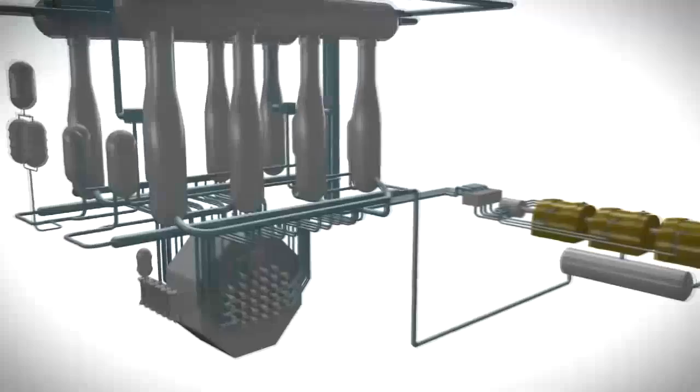We use a defense in depth approach to make sure we have adequate safety to the environment and to the public. Defense in depth means having highly reliable redundant equipment, highly trained operators, and layers of safety systems to ensure the safety of the public and the workforce here at Bruce Power. Two independent shutdown systems are poised whenever a reactor is operating. Either of them can shut the reactor down in just seconds if operating parameters are exceeded.

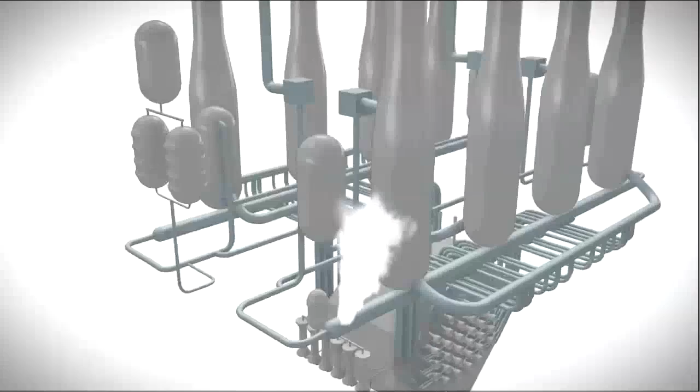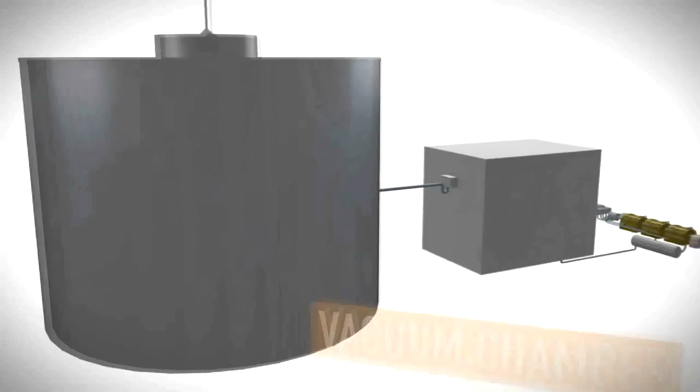In the unlikely event of a coolant leak, an emergency cooling injection system is poised to supply water to the reactor to keep the fuel from overheating. Pumps would circulate this water as long as necessary, with standby emergency generators providing power if needed. The reactors themselves are enclosed by large concrete vaults that contain heat and radiation. The vaults are connected to a large vacuum building designed to relieve pressure and provide additional containment and cooling.

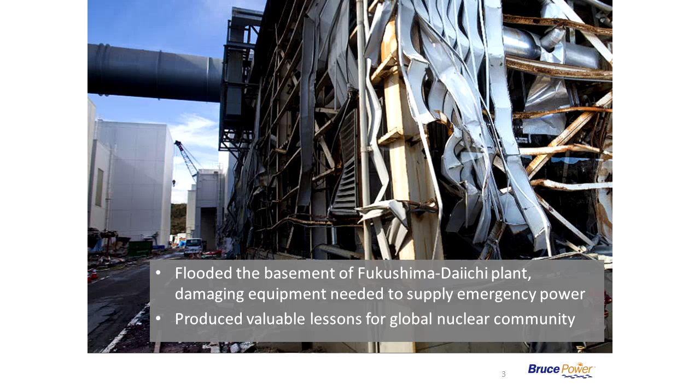This is the way plants have been designed traditionally, and they've been very safe over the years. But Fukushima brought upon a new concept, in that the plants were self-contained. They had many levels of redundancy and backup power and so forth. Fukushima demonstrated that perhaps in some circumstances a situation could arise which would actually disable all of that, because it's all in one place.

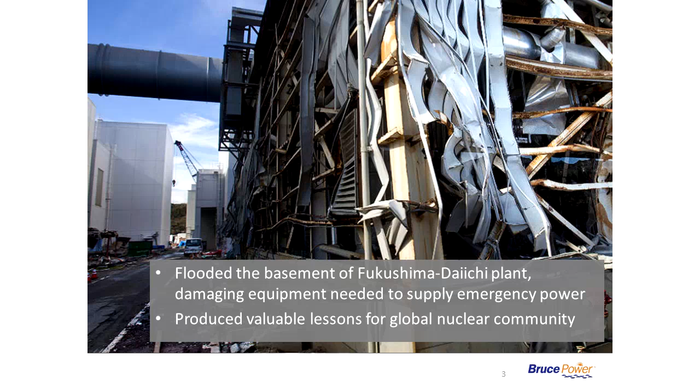The event at Fukushima was a very significant event, not likely to happen with high frequency, but still with some level of plausibility. So the challenge became how to prepare for this type of event, which is of high consequence but very low probability.

So we looked at an enhanced emergency response approach that would allow us to provide an even broader level of diversity into our protective systems. And we wanted to add some additional layers to defense, primarily aiming at the two things that a nuclear facility needs most of all, which is backup power and cooling water.

So emergency makeup water, we looked at in a number of different places. This just illustrates the changes we've been making and what they look like.

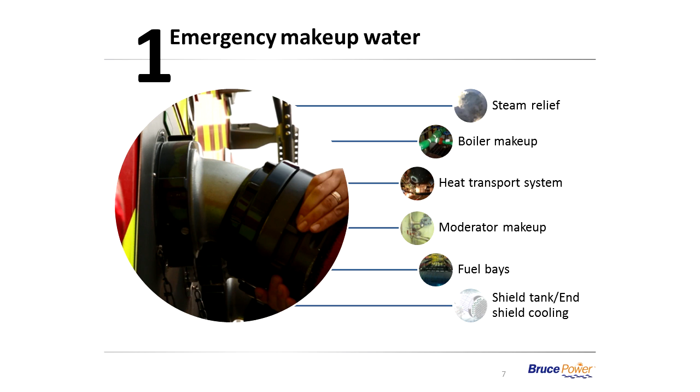If you should lose a heat sink through the turbine, then the large relief valves on top will lift in order to relieve the steam to atmosphere and cool and depressurize the heat transport system. In an emergency situation, this is exactly what you want to happen. You don't require any pumps—the heat transport system will circulate naturally, with cool water up at the top and the reactor at the bottom, and it'll cool, and the fluid will circulate with no pumps and no power.

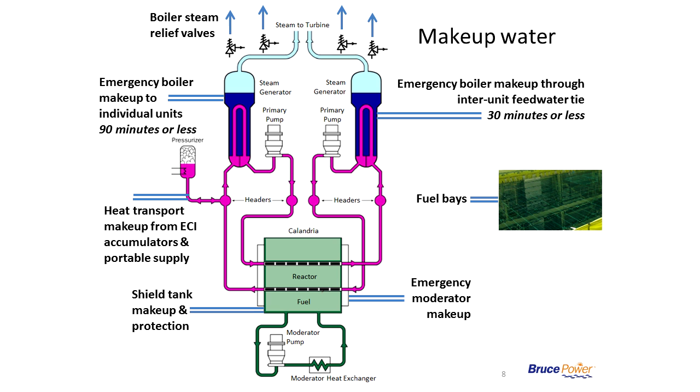To make this happen, you need a few things to be done though. Number one, you need the boiler steam valves to be open so that there's somewhere for the water to go, so it steams off as steam. Now there are different ways you can do this in the plant already. What we did was add another manual way of doing this through independent air tanks, so that we're sure we can open these valves and lock them open.

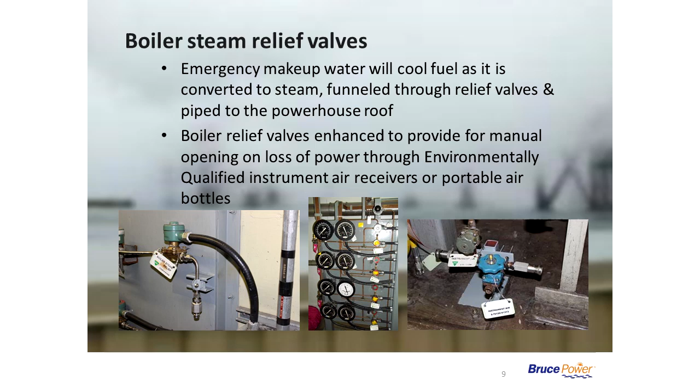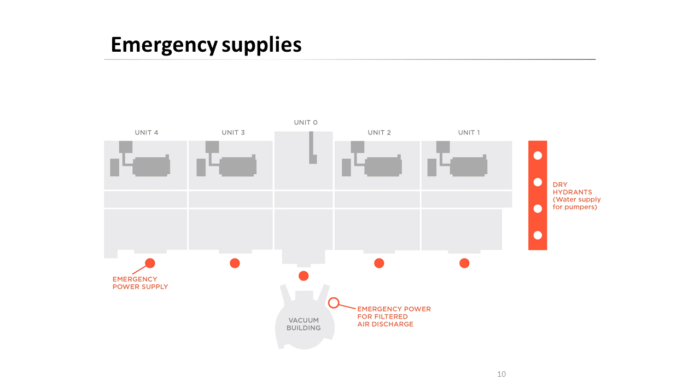Second thing you need is water in the steam generator. So the first path to water in the steam generators is through the inter-unit feed water tie, which is in place. It takes 30 minutes or less to hook this up for all 8 units, and that provides makeup water to the steam generators. Not being satisfied with one, we have a second way of making up water to the steam generators, which can be done through each individual unit. That takes about 90 minutes to hook up to all 8 units, and the time frame we have here is about 6 hours or so to do this properly.

Next thing we need to do is make sure that the heat transport stays full of water. Obviously, in order for it to circulate and cool, it needs to be full. When you bring a reactor down from power and the heat transport fluid cools, it shrinks, and you have to add makeup water to keep it full.

The 2 Bruce reactor designs have a very unique feature not seen on many reactors: what we call heat transport accumulators. They're large tanks with a large amount of water stored in them, about 625,000 liters or so, pressurized by nitrogen, requiring no pumps. They sit on the system and will supply water to the reactor automatically when needed, and there's more than ample supply to keep the heat transport system full.

There are 2 gate valves which need to open in each unit. Those are supplied from all the emergency power sources on site, but we've also provided a hookup to the portable generators to open these valves. They can also be opened manually. So there are multiple ways that we can make sure we get the feed water in.

The next layer of defense, should all that fail and you want to keep the fuel cool, is to keep the moderator full of water. The moderator is not a pressurized system; it has very large rupture discs on it. So you add water, and we have a number of ways of adding it. The main thing we needed there was the pumpers, which we have, along with our severe accident management procedures, which allow us to add water today.

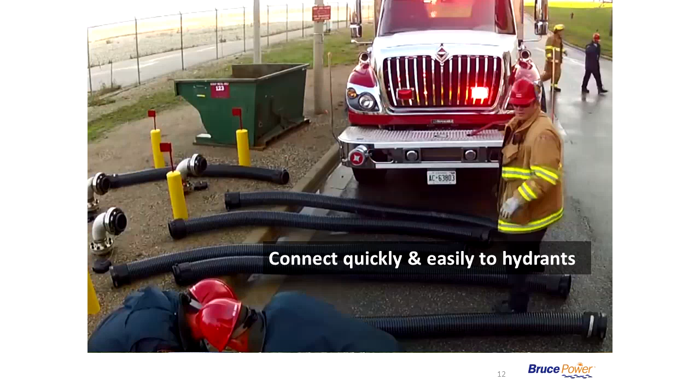These are the dry hydrants I talked about. They're actually just a pipe that drops down into the channel that flows out into the lake. This operates at lake level, so you're essentially drawing on the lake here.

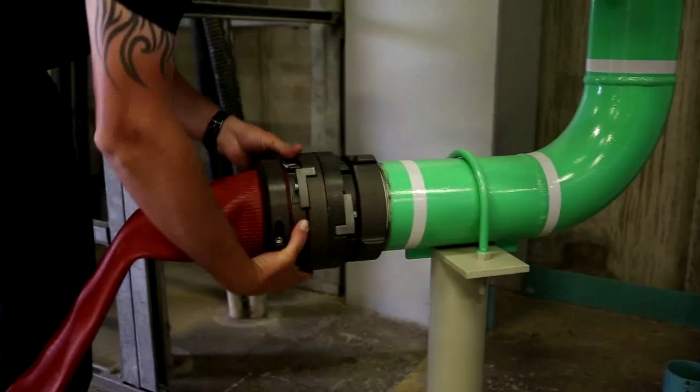You hook them up to the suction side of the truck, quick and easy, and now you're ready to pump water out the other end. This shows how the connection point works from the truck: connect there, another quick connect in the station to the inter-unit feed water tie, and you're now ready to supply water to all the boilers in either station. So that's the 30-minute hookup, that particular version.

Here are a few pictures of the individual unit hookups. Remember, I told you there are 2 ways: one I just showed you at the inter-unit feed water tie, and this other one is in the units themselves. Again, you see the quick connects here; you just hook up to them and you can supply water.

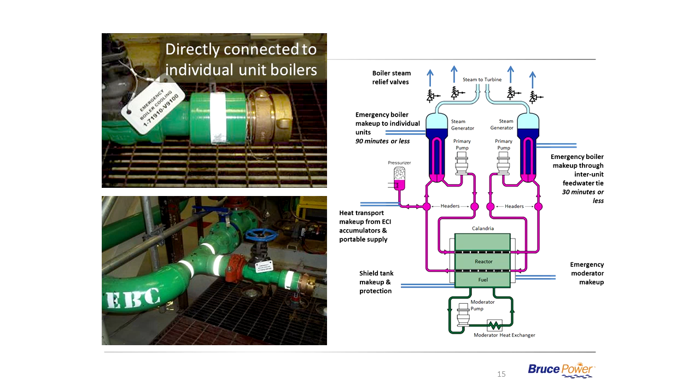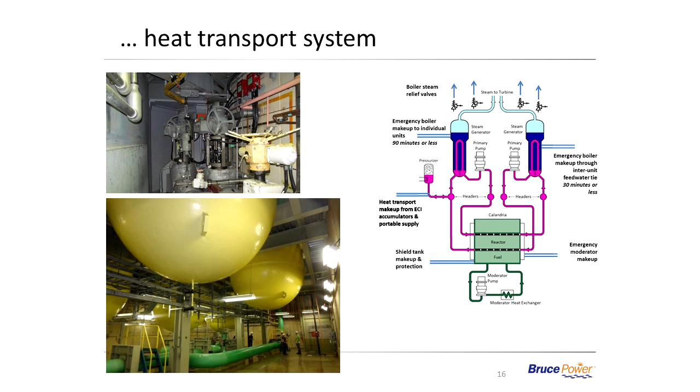The moderator makeup and the heat transport makeup to the quick disconnects - that begins happening with unit outages in 2016: 3 of them in 2016, 3 in 2017, and the last 2 in 2018. That'll be the moderator and heat transport makeup connections.

Meanwhile, we do have the SAMG process that we can use to hook up manually. The quick connects are meant to be physically diverse, providing a second way of doing it that's different from the first, and a faster way. Although in truth, in the analysis, the moderator does not need to be done in a short period of time - you have time on the moderator system.

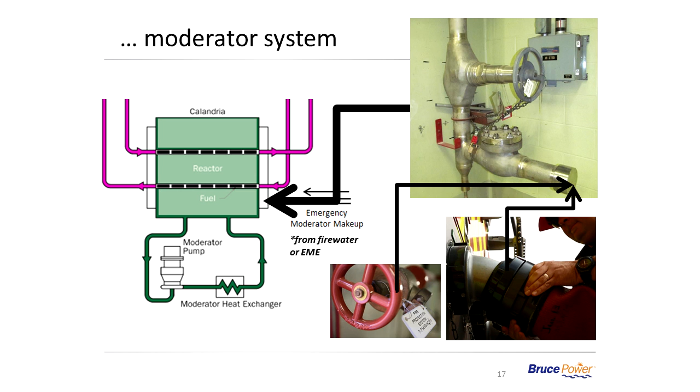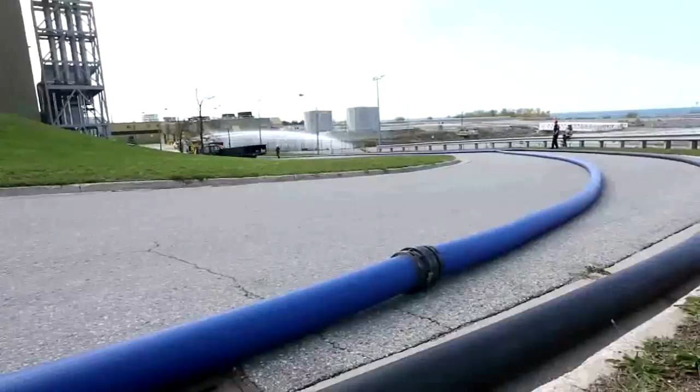Our program for the Fukushima event is really a simple concept. We're taking everyday pieces of emergency response equipment, such as fire trucks, and we've trained our staff to deploy them in an unconventional method. So instead of fighting fire, we're making connections - hard piping onto the stations themselves - to provide cooling in a timely fashion, ensuring the reactor cores remain cool and the fuel bays remain covered with water.

Now to talk a little bit about emergency power. Again, the philosophy here is quick, simple connections with material and equipment that the staff are used to using.

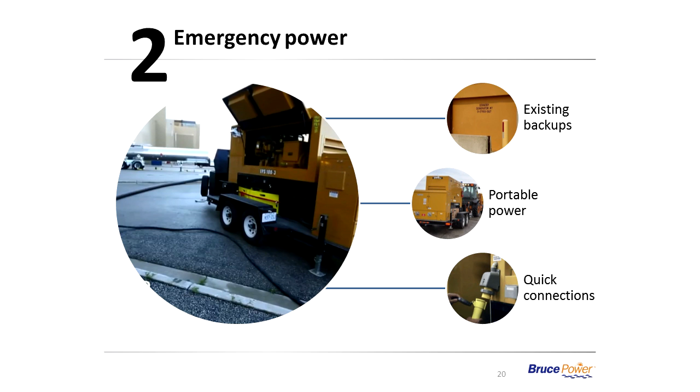So the first thing we should point out is we have a fair amount of redundancy in backup power. We have 4 standby generators and 2 emergency power generators at each station. The emergency power generators are called qualified power supply at Bruce A - a different name, but the same system. We have existing standby generators and emergency power generators that are part of the plant design.

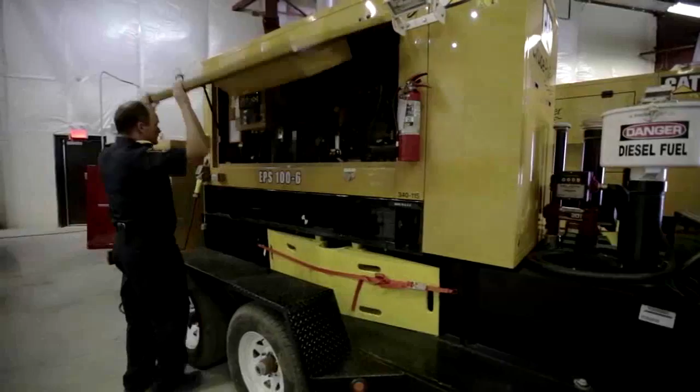There are also other backup power systems. We have diesel generators that back up our class 3, and other diesel generators that back up our qualified power supply. We realized that if we lost all of our fuel tanks, we needed another backup. They're in place to make sure that if we have a loss of class 4 power or other power losses, power still gets to the critical parts of the plant.

So you see here a few of the tractors and other things in our storage building that we use for this equipment.

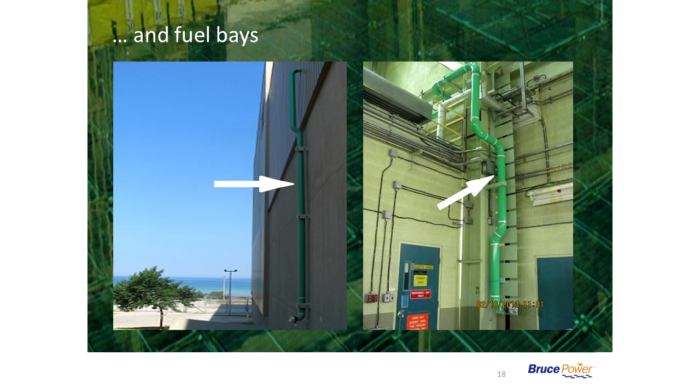A few pictures to show you - this is the Bruce B side, the 100 kilowatt generator plus the hookup; this is one of the units, I'm not sure which one, I can't quite read the sign. These are all marked inside the station so you can't misread them, and the doors leading in from the outside are marked to lead the teams to the right door so they don't have to fumble around in an emergency doing it.

Again, these are the 100 kilowatt generators. There's a redundant generator there - only 6 are required, and we have an extra.

This is at Bruce A side. The electrical system at Bruce A is a little different design, so we have a 400 kilowatt generator there, and this is it hooked up over at Bruce A.

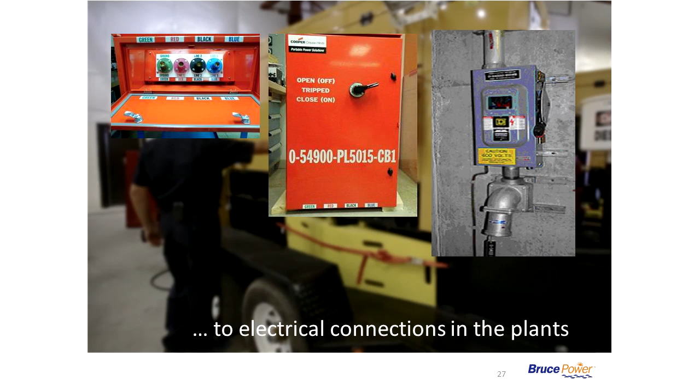The other thing, of course, is this was a lot of new equipment and new operating skills that hadn't existed before. So we needed to do the task analysis and develop the training, take people through the qualifications, and invent some new qualifications to do that, and that's been done. We're still looking at the systematic approach to training on the broader ERO skills, the guys in the emergency management centers and the like, and there's still some work ongoing. But all the emergency response personnel have been through this training and have done it many times now.

And we haven't forgotten about one of the key risks. There's some danger sometimes when you get looking at the exotic risks, the tornadoes and the big ones, that you forget about the day-to-day things that are problematic. The one that's probably the biggest risk for us, and probably the biggest risk for any building or house, is actually fire. So we haven't forgotten about that. We've been doing a lot of work on this as well, both because it's a risk day to day, and of course in a catastrophe when things go wrong and tornadoes go through, sometimes things catch fire.

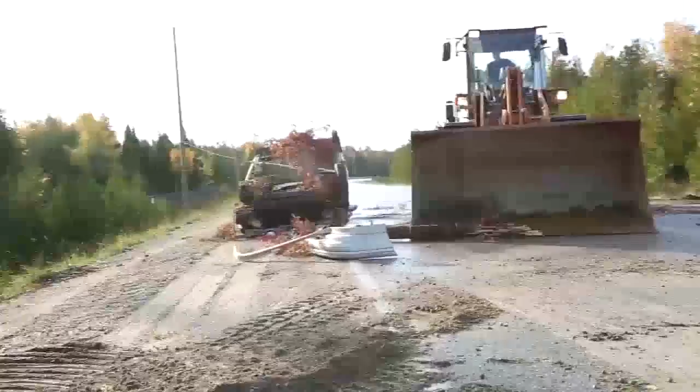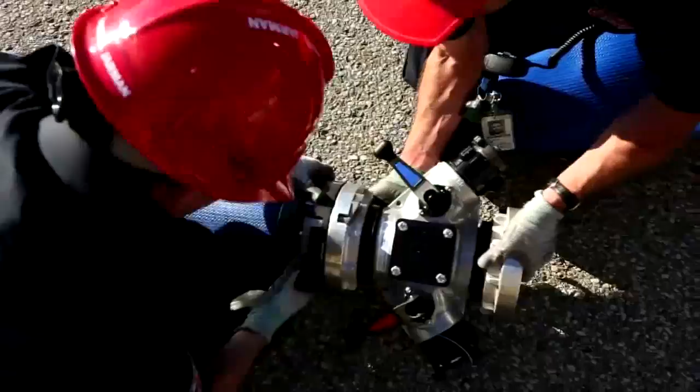Bruce Power first responders are being trained on payloaders and know how to remove debris. The payloader makes room for the fire trucks to get to the stations. The fire trucks can now pass through and get to the station to cool the fuel. Arriving at Bruce A, the team must attach hose from the dry hydrants to the trucks to pull water from the lake and pump it onto the fuel. These trucks can pull up to 3,000 gallons of water per minute, more than double the ability of standard fire trucks. They must then attach hoses to the fire trucks to deliver water to the stations. A tractor and hose trailer are used to lay hundreds of feet of hose to supply each station's 4 reactors with cool water. The water provided to each reactor keeps the fuel cool, and the risk for overheating is eliminated.

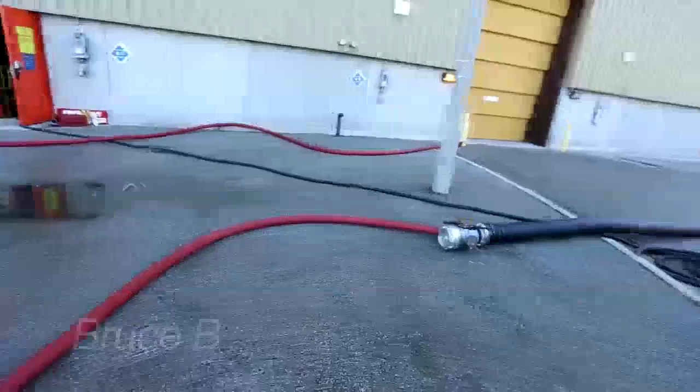Simultaneously, they must carry emergency backup generators by tractor. Bruce A has one 400 kilowatt generator, and 6 100 kilowatt generators go to Bruce B. These generators run for 36 to 48 hours without having to refuel. While the team sets up the fire trucks and generators, those working inside the plant prepare to receive the cool water and power.

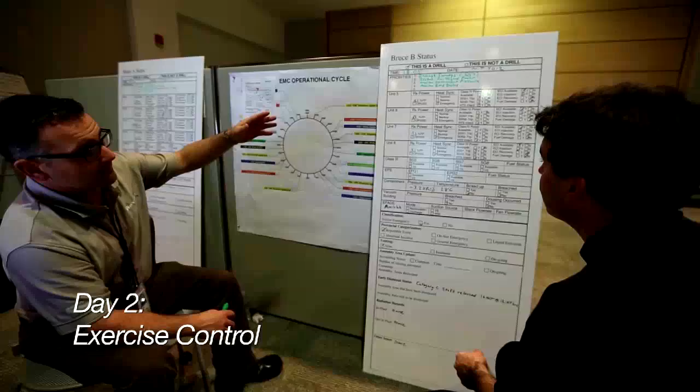Also at the Bruce Power site, Exercise Control, or XCON, continued to set up challenges for the 71 participating organizations in the 4 counties of Grey, Bruce, Huron, and Wellington. XCON is made up of staff from each participating organization and Emergency Management Ontario. These small teams of people exemplify months of planning for each exercise theme. The teams at the various emergency operations centers react to situations called injects, provided to them by the XCON team.

Huron Challenge was one of the largest emergency drills carried out in Ontario. And of course, the last thing we needed to test was the durability of the trucks and the pumpers themselves, so we put them through a 24-hour run. Back at Bruce B, the fire trucks continue to pump water well into the night. The trucks have refueled and must continue to pump water for 24 hours to prove they are self-sufficient.

Having proven self-sufficiency for over 24 hours, the following morning, the fire trucks are allowed to be shut off. Site 1, this is Bruce B. Pumpers, confirmed successful refueling through the night. Trucks have run successfully for 24 hours. Request we shut down, over.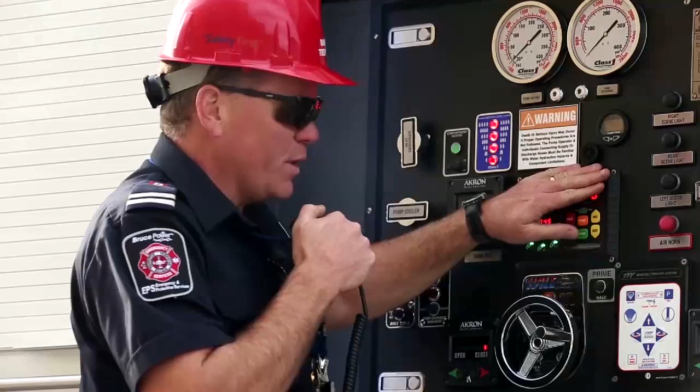In fact, we used our portable pumper to fuel those trucks while they're operating. You have to fuel them about every 5 hours when they're running full tilt like that. So the portable truck comes around and fills them up while they're running, without interruption.

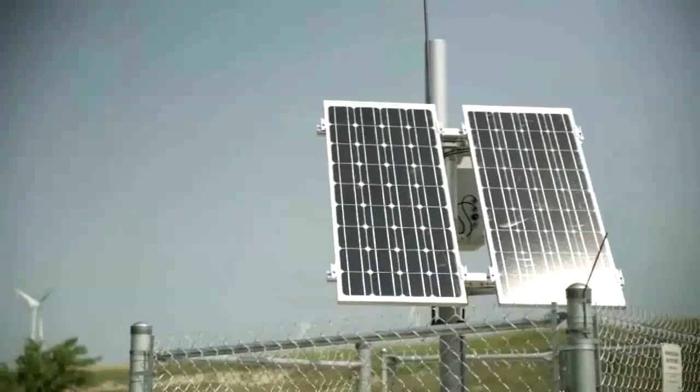And of course, the next step is, what about off-site? Should the emergency get to the point where there's an off-site release, how do you deal with that? We've developed a new off-site monitoring system out to 10 kilometers, which will automatically detect any radiation released. In fact, it'll operate 24/7 whether there's an event on or not. This will provide very accurate and detailed tracking of any radiation that might be released in an emergency, thereby allowing the government to easily move people out of the way.

The remote monitoring system at Bruce Power consists of 44 spectrometers, or radiation detectors. The system itself is fully redundant in the sense that the detectors are battery operated, with trickle backup solar panel charge to sustain operation. The data from the detectors is sent through the cellular network, which provides us the capability to have near real-time remote monitoring around the Bruce Power site.

Where we retrieve the data from the detectors is within our emergency management center, and the emergency management center itself is also fully redundant in terms of backup power and backup communication systems. So as you see behind me, we have a remote monitor with very sensitive detectors. In fact, they're so sensitive they'll actually pick up on everyday common household items.

In terms of expanding our public notification system, we've looked at not only use of sirens, but also capabilities such as FM radio connection to the public alerting system within the province of Ontario. You can have different normal or high priority messages, and I'll just type in 'this is a test,' so I'll hit send now, and that is sent.

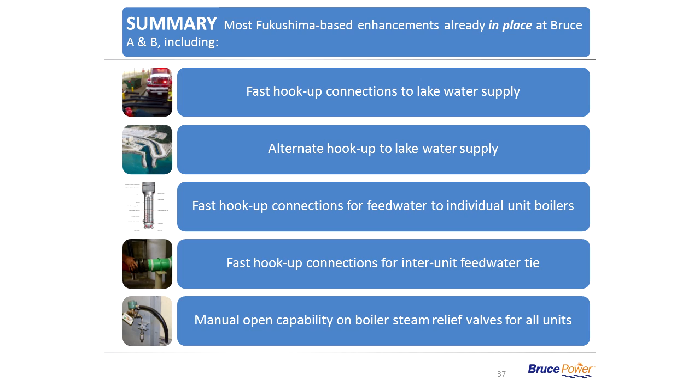Fast hook up to the lake water, alternate hook up to the lake water supply, fast hook feed water to individual and unit boilers, the inter-unit feed water tie, and manual opening on the boiler steam and relief valves on all units.

Fast hookup water connections to the primary fuel bay and to the secondary fuel bays. Fast hookup water connections to the moderator on Unit 1-2.

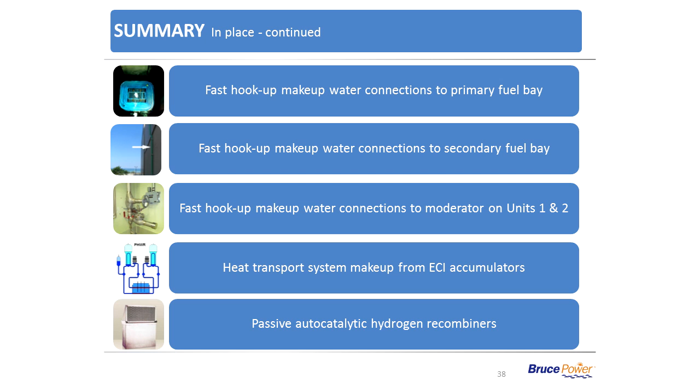Heat transport makeup from ECI accumulators and passive autocatalytic hydrogen recombiners, all done and in place. Severe accident management method to make up water to the heat transport system, and the severe accident management method to make up water to the moderator.

This basically means that we manually hook it up rather than using a quick disconnect to do it.

Fast hook up electrical connections for each unit and the common systems, as well as the EFADS. Fast hook up electrical connections for the containment emergency filtered air discharge system.

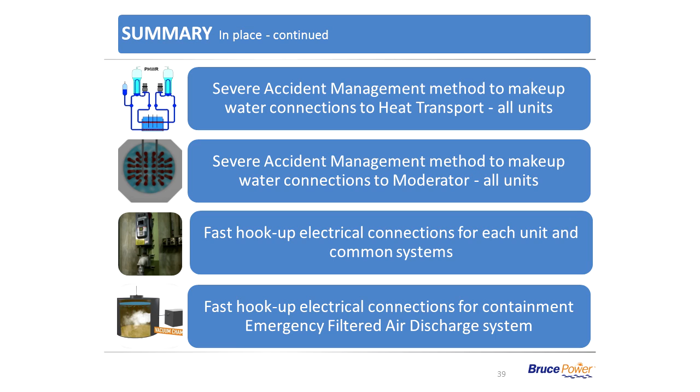Again, all in place. Support facilities: a new emergency management center in place, portable command post in place, communications capability independent of local infrastructure, so we don't require wires or even cell towers to work.

New fire training facility, as you have just seen. Portable high capacity water pumpers, 5 of those. 12 portable power generators, portable fuel retrieval and delivery truck, portable equipment transportation capability, again, all in place.

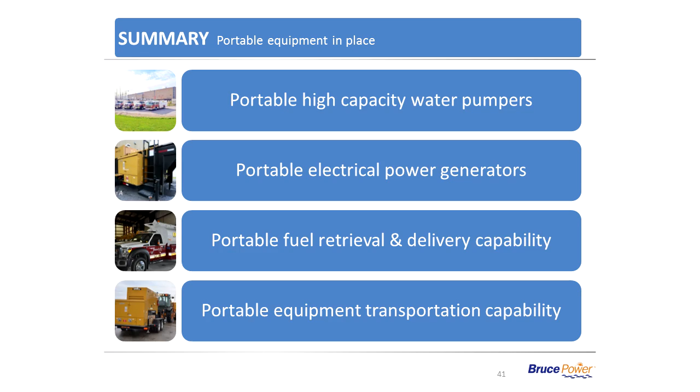Heavy-duty equipment for route clearing, portable equipment storage building, firefighting equipment, and a maintenance and testing program for all that equipment, all in place as of today.

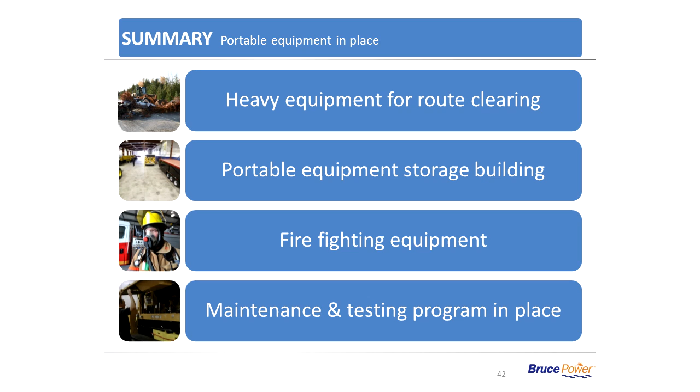Off-site support in place. We've got a communication system that works very well. We can talk to people virtually anytime.

The radiation monitors out to 10 kilometers are in place, and we have deployable radiation monitors that we can deploy beyond that should we need to.

Potassium iodide tablets, we actually just started to get the delivery today. They were a little slow, so this is them in the new package, and we can let you have a look at those after a bit if you like.

And this is a booklet. It's also on the Be Prepared page on the Bruce Grey website now, with all the different emergencies in it, including nuclear. The FM alert radios are here, the system is ready to go.

We opted to do the distribution after we do the KI pills so as not to confuse people, so we'll be doing that very shortly.

And that'll actually be a fairly broad distribution because we don't see the FM alert as particularly a nuclear capability. It's a capability that the communities can use for emergencies in general. It just includes nuclear.

Safety assessments. Our chief engineer is going to talk here in a minute about the safety assessments and where we've got to, but we've included some pretty extreme external events in here.

Despite that we broadened the events and broadened the requirements considerably, the addition of the EME, as you might expect - the emergency mitigating equipment - as a whole new layer of defense, has made a significant improvement on the overall outcome of those PSA results.

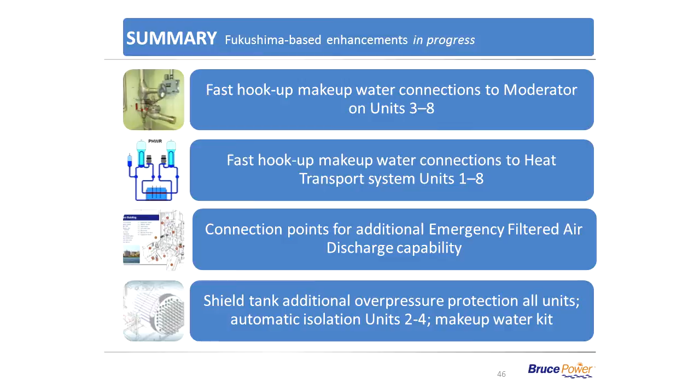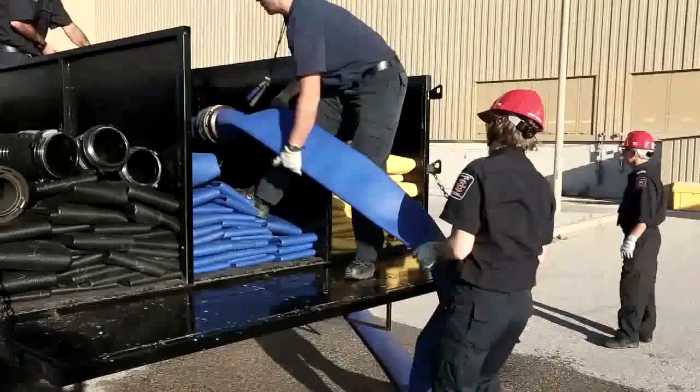We feel that we've taken the Fukushima events very seriously, applying the lessons in a much broader sense than they would have applied in Fukushima, looking at not just those kinds of events but any kind of event that might occur. We think our crews are well trained and on standby 24/7, so we feel we have the capability in place to deal with virtually any emergency. We invite you to drop by our visitor center and have a closer look at the plant and the facilities here, and I think you too will walk away with a level of confidence that the place is well looked after and we're well prepared.

That was a little long, but I thought it important given the central place that Fukushima has taken in the last few years and the amount of effort and time put into it, to really go through it in some detail and talk about what's fully in place and what's yet to be done. So that's it for that presentation. I'll now move over to Mr. Newman to talk about PSA.

Okay, excuse me. Thank you, Frank. Good evening, for the record, Gary Newman. I'm going to be speaking to you this evening about assessing and understanding risk. We'll be doing so at a fairly high level. Obviously we could spend a number of days discussing this topic if time were available.

So for the purpose of this Part 2 Commission hearing, we felt it was important to provide more detail on all the work completed to evaluate both internal and external sources of risk, which in turn demonstrates that Bruce Power is compliant with current CNSC regulations.

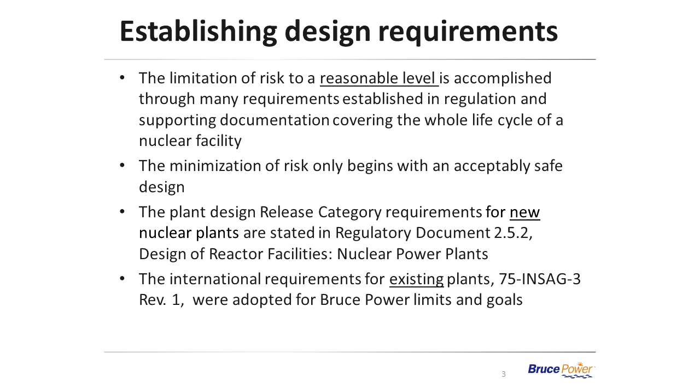The design requirements were established in the original siting guide, which identified the deterministic design and operating requirements and sets the single and dual failure dose limits.

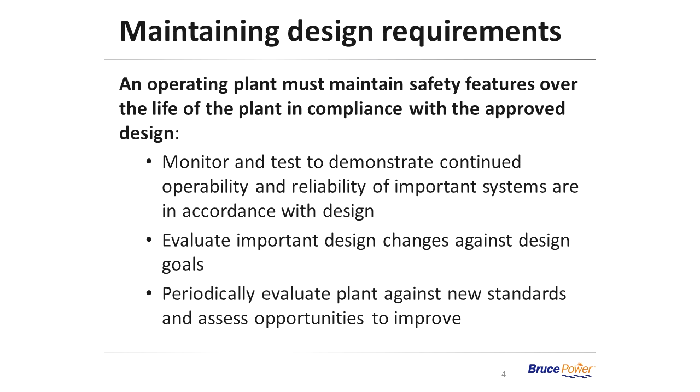From a safety report viewpoint, probabilistic assessments were added to the original deterministic tool set beginning in the 1990s. At that time, goals and limits were set for severe core damage, large and severe release, as well as public health criteria. These early PSAs embraced release thresholds that were approximately 5 times larger than the current values, which has resulted in the need to produce more accurate predictions within the current assessments.

These historic PSA assessments were completed after the plants were in operation for many years, rather than as part of the design activity. Modeling activities were focused on comparing with the new expectations, so in general only enough work was completed to confirm that the limit was achieved.

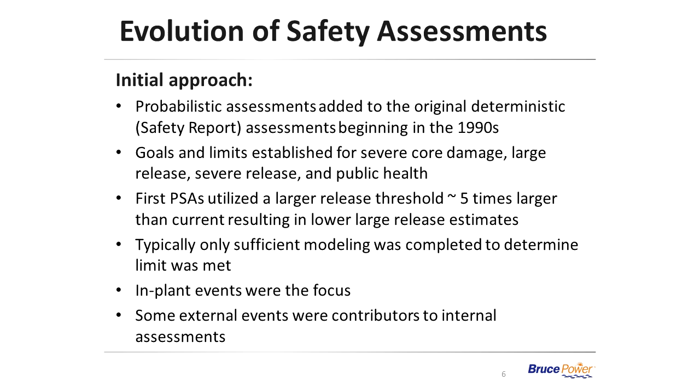This meant that many supporting systems were not modeled but simply assumed to not be available as a result of the event, which adds a considerable amount of conservatism. These assessments were focused on internal plant events, including the loss of off-site power, the latter of which was a single external event that was considered.

As part of the safety assessment evolution, a greater focus on external events was established by CNSC Standard 294 in 2005.

However, post-Fukushima, it was decided to broaden the approach to consider lower probability external events, accommodation of a larger consequence but lower likelihood event, and lastly, equipment diversity in the context of the robust nature to resist external disaster scenarios.

As per normal practice, updated regulatory documents in terms of both deterministic and probabilistic assessments were issued to guide this work by our regulator. The release categories were first updated in S294 based upon international practices and again documented in the regulatory documents when these new documents were issued.

So in the case of new reactor facilities, the sum of the frequencies are considered as follows. In the case of severe core damage frequency, the sum of the frequencies of all event sequences that can lead to significant core degradation shall be less than 10 to the minus 5 events per reactor year.

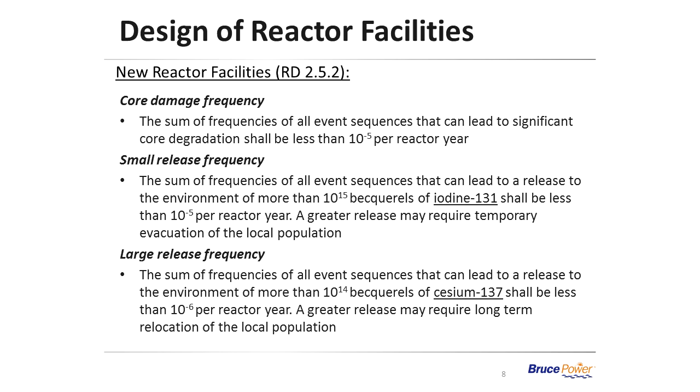These definitions were developed based on internal plant events, and there remains a discussion about how to properly integrate external and internal events and properly calculate an accurate aggregated release frequency. However, for the purposes of today's discussion, we have simply added them, although we know this is a conservative treatment.

As an example of the continuous improvement process, work has been completed to enhance the Bruce A and B safety reports through updated PSAs, which consider fire, seismic, high winds, and flooding under both operating and shutdown conditions. This was completed against the backdrop of updated PSA release categories.

The following lists the safety improvements that have been installed in the plants and were included in the internal plant event assessments. For example, the emergency makeup water from portable equipment directly into the boilers, as already described by Mr. Saunders. I do not plan to go through the list. However, most of these improvements have been fully installed and credited within the PSAs.

Fast makeup water to the heat transport system is currently ensured by additional emergency power to the emergency core injection accumulator tanks. Another committed makeup path for emergency mitigation equipment utilizes severe accident management instructions, which can also be established. Installation of a third path through quick connect fittings is in progress.

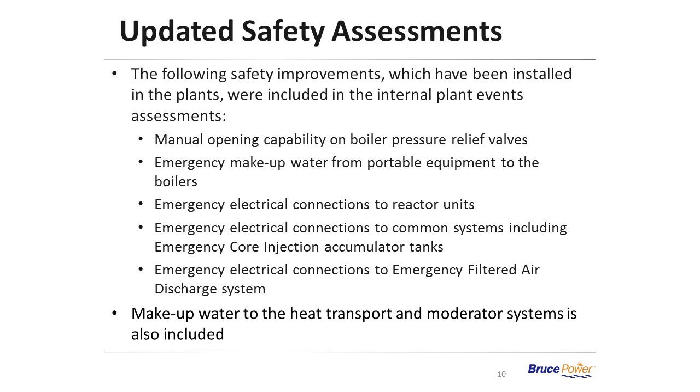Makeup water to the moderator system from emergency mitigation equipment utilizing severe accident management instructions can also be established. Installation of another path through quick connect fittings is in place for units 1 and 2 and in progress for units 3 to 8, as already described. I should note there was one additional bullet that may not be on your slide, regarding makeup water to the heat transport and moderator systems, which we added afterwards.

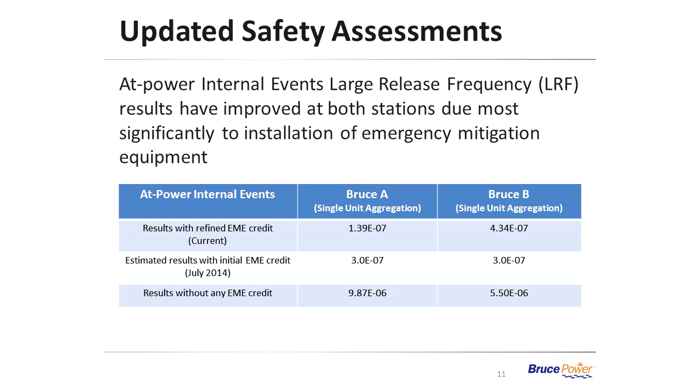Within the PSAs, also the estimated values for EME were provided in the July submission to the CNSC and more precisely calculated in the November license application update. The estimates proved to be pretty accurate.

Some safety improvements that were committed and currently in progress, as already described by Mr. Saunders, are credited in the station aggregation for large release frequencies and external events, for example, enhancements to containment robustness for multi-unit events. Although still a very conservative calculation, it demonstrates the progress made through the Fukushima enhancements and the value of the work still in progress.

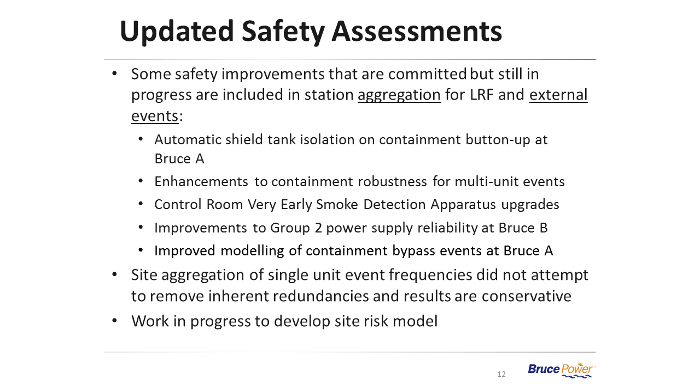It is also important to note that site aggregation of single unit event frequencies did not attempt to remove the inherent redundancies, and results are considered conservative. Lastly, industry-driven further work is underway to develop a site-based risk model, which we believe is currently leading the industry in this area of development.

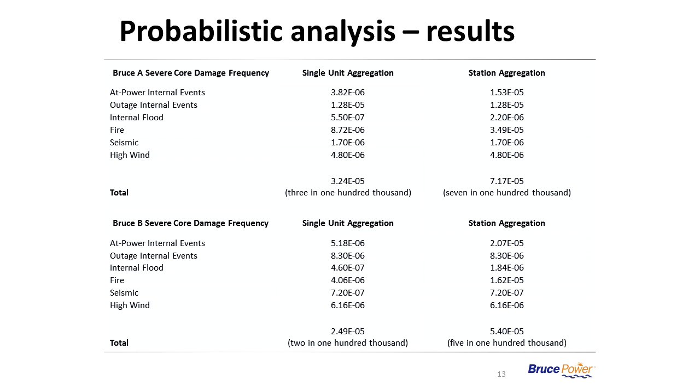On the next slide, we have results for severe core damage. This table provides results for each station, for the combination of internal and external events, for single unit aggregation results in column 2, as well as station aggregate results in column 3. All of these results meet the requirements of the current criteria.

On the next slide, we similarly summarize for large release frequency. These results demonstrate that on both a unit and station basis, we meet the current acceptance criteria.

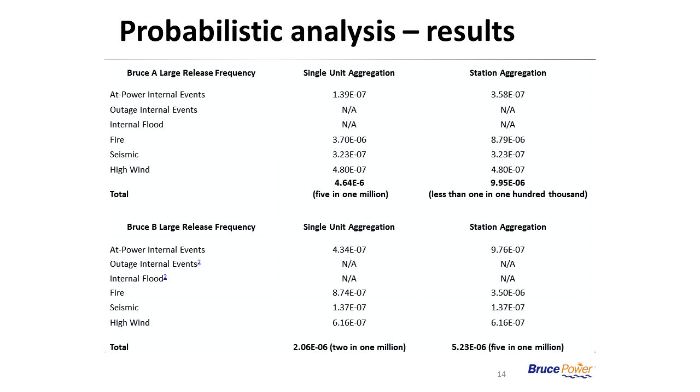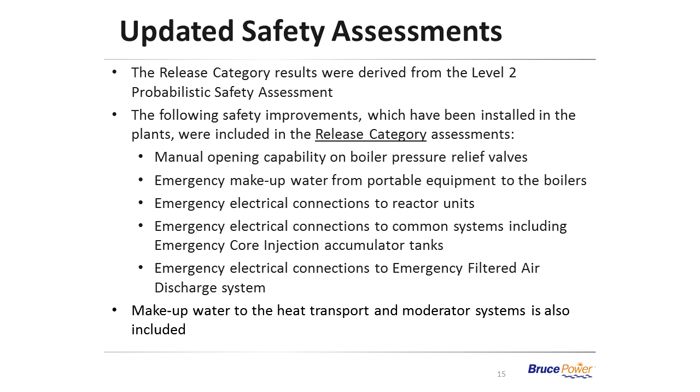Just like for the severe core damage frequency calculations, we have similarly credited installed EME for release category assessments, and you can see examples of the noted improvements in the following table. So for example, the design basis events at both stations, one can see the frequency improvement when crediting EME, comparing the third and fourth columns. These release frequencies, while still very unlikely, are the most probable.

The releases would occur as a result of venting of containment through the emergency filtered air discharge system. This type of venting maintains containment pressure low and prevents release of isotopes that can result in longer-term contamination. These are the type of events where shelter in place may be a viable option, and as Mr. Saunders has indicated, the use of potassium iodide may be directed.

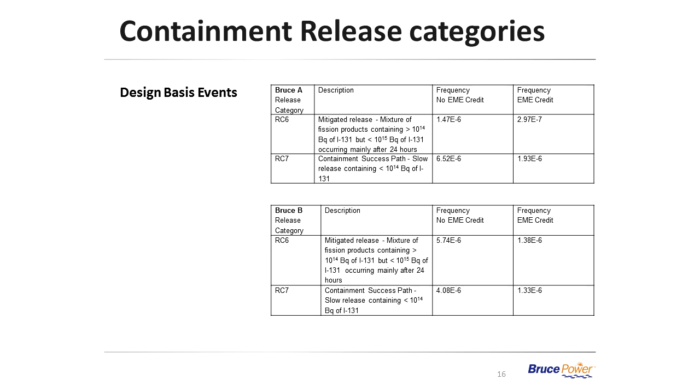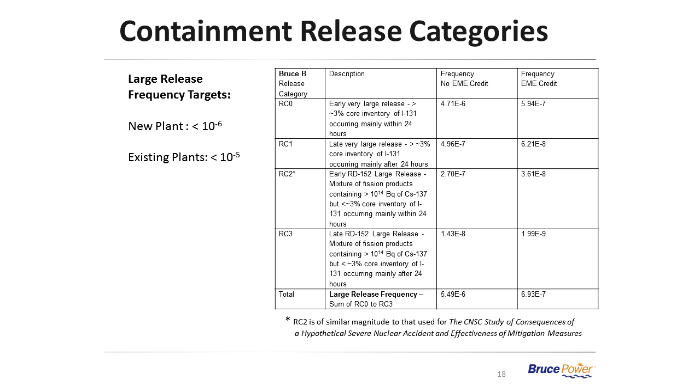And on the next slide, the same again for Bruce B. Decrease in frequency when EME is credited, well below the 10 to the minus 6 cutoff, normally associated with incredible events.

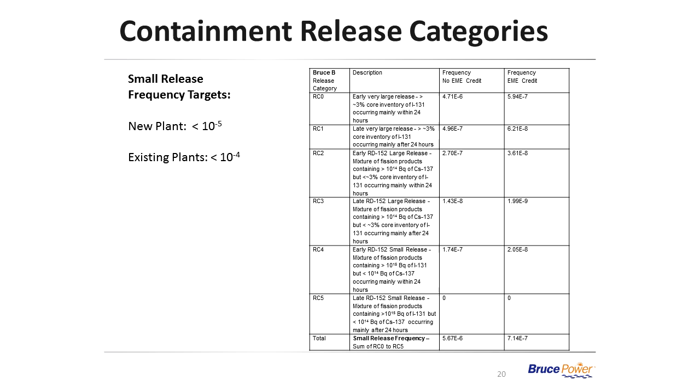And on the next slide again, the same outcome for Bruce B. And again, as already noted, the term small release by definition includes both small and large releases, and might more accurately be called all releases or total releases.

Moving on to some of the new tools that we're deploying, and again, this was touched on by Mr. Saunders, we are developing tools which enhance emergency response capability to aid in our already extensive drill requirements by simulating events to identify areas for improvement within existing practices to make them even more robust. The tool also provides, through Monte Carlo simulation, the probability of successful deployment of EME under a wide variety of circumstances and points out potential challenges which can then be adjusted to further enhance our response capability.

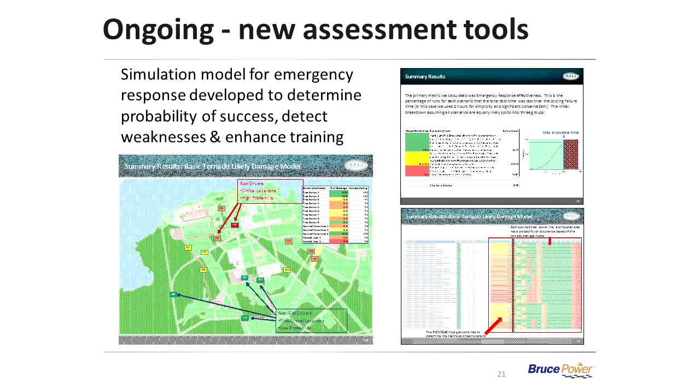As I noted earlier in the presentation, there are a number of in-flight projects that are being implemented to add further enhancements to the stations. And these are all on track, as described by Mr. Saunders, as per schedule and as communicated through formal correspondence with the CNSC.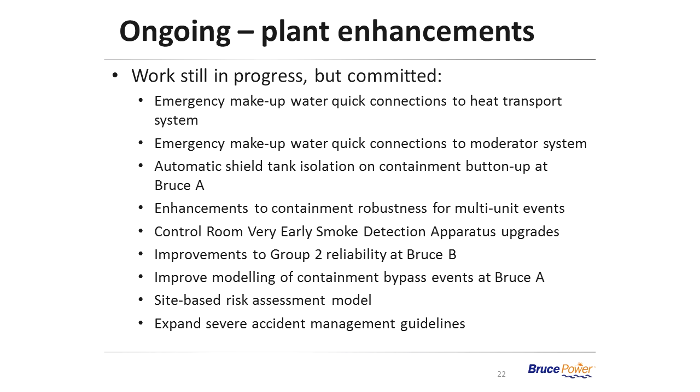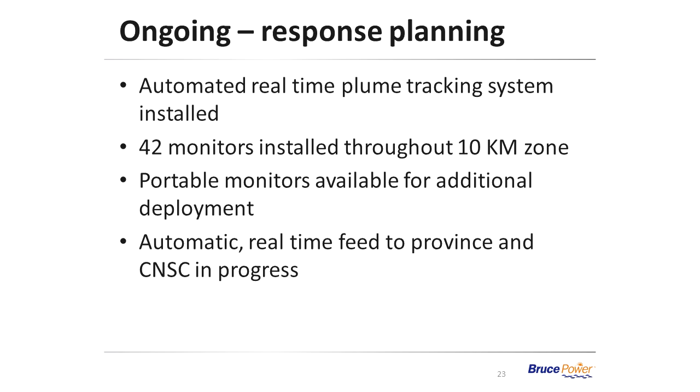Current ongoing work supporting response planning, including, as already mentioned, 42 installed monitors within a 10-kilometer zone, automated real-time plume tracking system supported by portable monitors available for additional deployment, with implementation of automatic real-time feed to both the province and the CNSC organizations. It is important to note that this is not just a paper exercise, but that the information gained from these assessments is being utilized to enhance both on and off-site emergency response capability.

In addition, work is underway to develop enhanced predictive plume modeling at the industry, provincial, and regulatory levels. And this modeling capability will support assessment of a suite of accident scenarios. This is consistent with the practice by the US NRC.

Working with the province and municipalities to improve public alerting capabilities for all emergencies through technologies such as the FM alert, which provides further defense in depth, and this is due to begin this spring. In addition, we are working with Pelmorex and communication companies to establish a cellular text alert system. Again, we are building additional barriers to ensure continuous improvements to our response capability.

An additional element of our response planning is the distribution of potassium iodide to a radius of approximately 10 kilometers. This measure is just underway with the necessary instructions along with website and public information sessions. Once complete, we will have measures in place to sustain the program through a periodic refresher program. And lastly, distribution centers will be set from 10 to 50 kilometers to allow access.

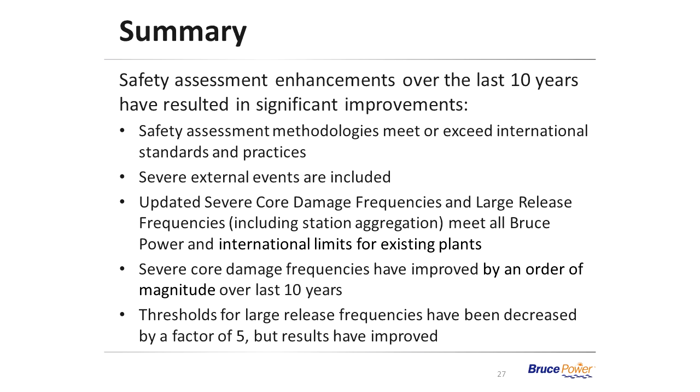In summary, Bruce Power and the industry have been diligent over the operating life of our plants to review plant design against modern standards, including safety assessment methodologies, and to apply this knowledge in real plant enhancements. We've seen some of those in the prior presentation tonight. The continuous improvement in plant performance that has resulted from this effort is a demonstration of the superior approach in the Canadian regulatory environment, which encourages ongoing improvements.

The Fukushima enhancements have been effective at reducing overall risk. Based on the current practice of analyzing large release frequency against in-plant events, including multi-unit events, Bruce Power not only meets the international standards for releases for existing plants, but for the most part would meet the requirements for new plants. The work already committed for Bruce A is expected to also bring Bruce A in line with these numbers. We do expect, as aggregation of individual results is considered both in Canada and internationally, changes will occur in some of these methodologies. Bruce Power will continue to participate and support this effort.

We have considered the release category results of the PSA work as well as the CNSC study on hypothetical severe nuclear accidents and effectiveness of mitigation measures in relation to off-site emergency planning, and find that the current planning zones are adequate, but that the reliance on local infrastructure for monitoring and communication in a regional disaster scenario needs to be reduced.

Finally, it should be noted that the calculations to complete these assessments were rigorous, with the final results encompassing nearly 40,000 pages. Large amounts of time could be spent debating all the possible perturbations, but the work was completed in accordance with approved methodology and at a high level has been summarized in the preceding series of slides. Thank you.

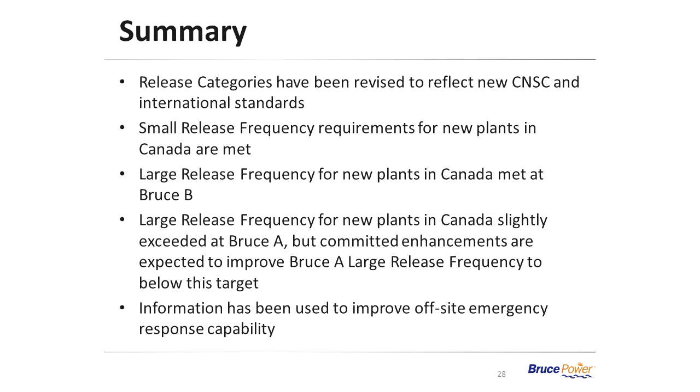Frank Saunders again for the record. One short presentation left from our side. This goes to some questions we had from the commissioners at the last part one hearing around what the monitoring points were that we used to assess public dose. So this is a short presentation to show you where those various monitoring points are and what they look like.

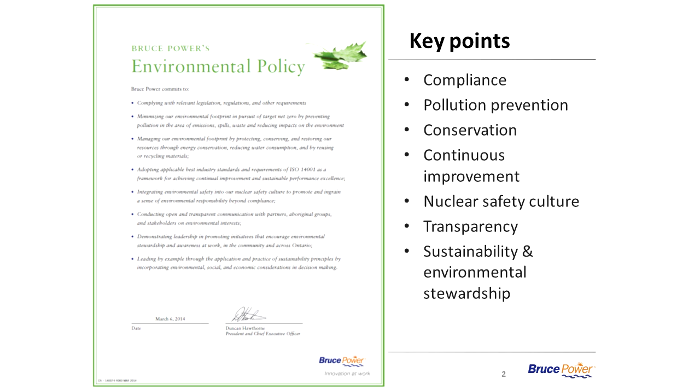This is our environmental policy and the key points that we use in our day-to-day operations. Environmental management encompasses a number of programs. There's an ISO 14001 which governs our management system, and then CSA standards govern how we actually carry out a number of these activities.

Our normal dose found in terms of members of the public has been pretty consistent ever since we became Bruce Power, in the order of 0.1% of the safe allowable limit.

So this is where we sit in the province of Ontario. The two sources here, of course, the Bruce B on the bottom and Bruce A on the right, with a blue and a red figure indicating air and water emissions.

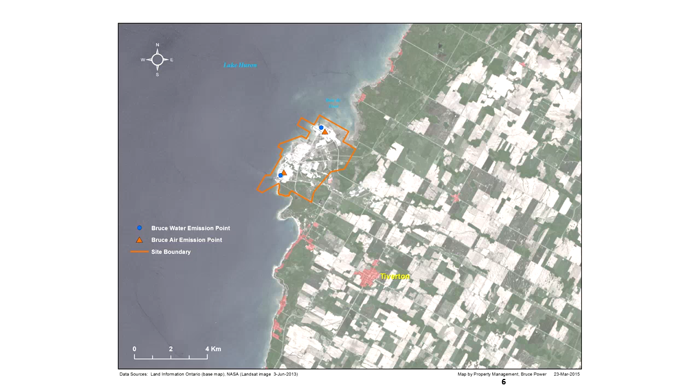These are the creek sampling sites, or streams if you'd rather call them that. There are a number of streams around the site that we also sample to look for any kind of runoff or water.

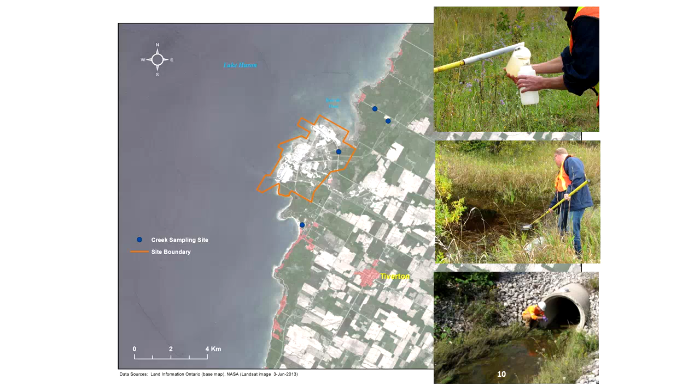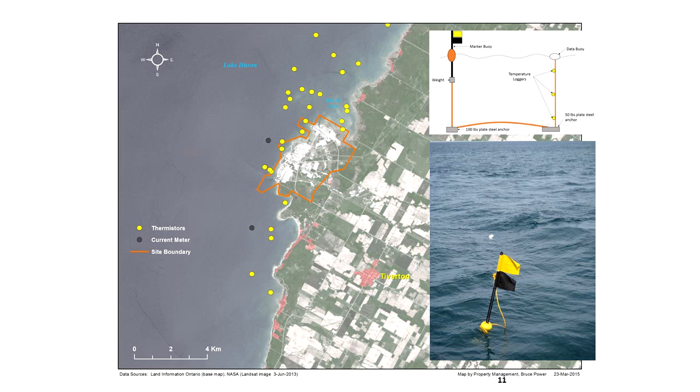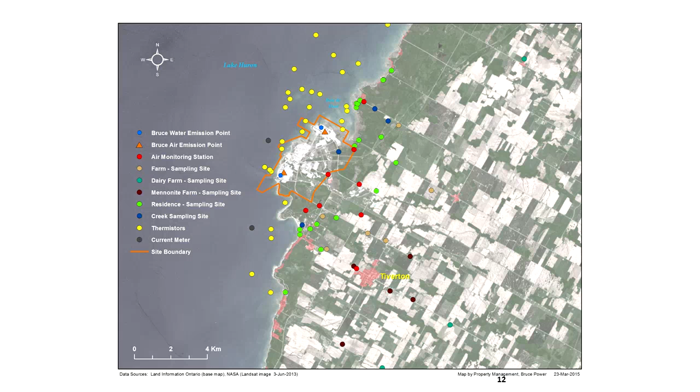This kind of puts it all together for you, just to show you the number of points that we look at as part of our dose assessment.

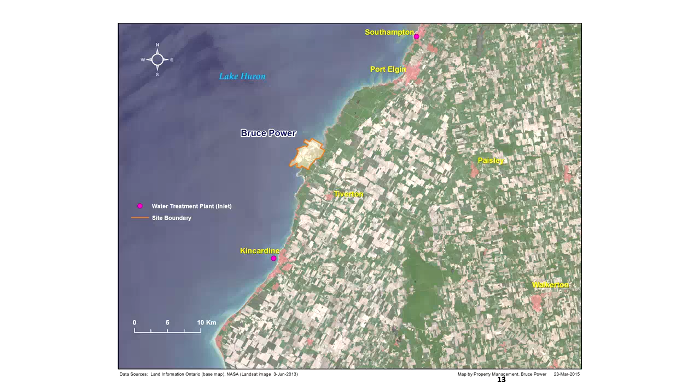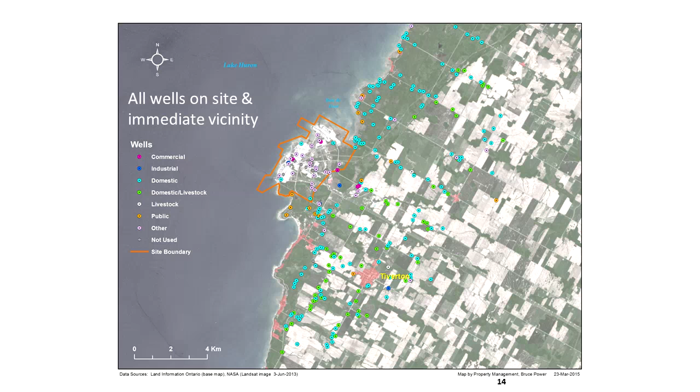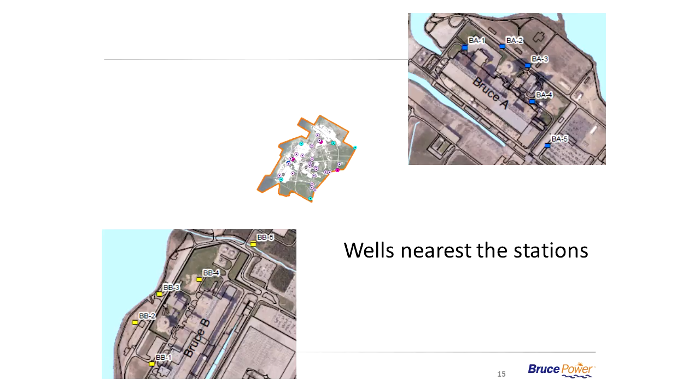And that concludes the presentations.

Thank you. In summary, members of the Commission, I think we tried our best here to provide explanatory information on some of the points that were of interest at the day one hearings. As I mentioned earlier, the intention here was to provide a bit more explanation of some of the points that either Commission members raised or we felt were appropriate given the tone and nature of some of the interventions. So, as was mentioned, we're available to answer questions, but the Commissioners have chosen to do that tomorrow, and that's fine. I just wanted to say, in conclusion from Bruce Power, that I myself can't be here all days of the hearing, but I'm certainly available if the Commission has any specific questions to ask of me over the course of the next three or four days. But I can assure the Commission that senior officers of Bruce Power will be here throughout. Thank you very much. Thank you.